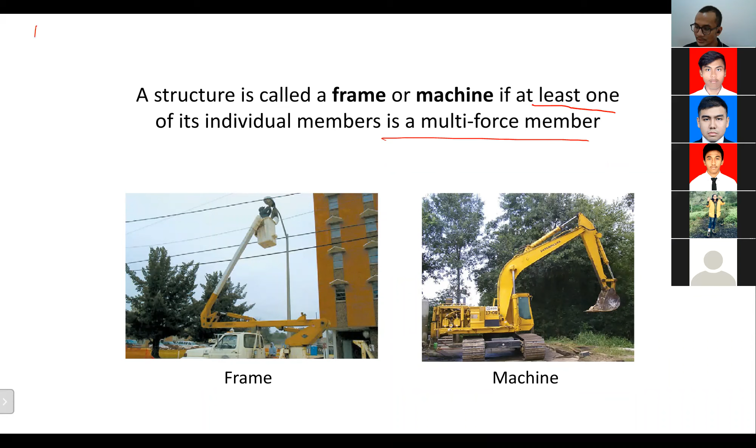So for truss, all members are two-force members. But for frame and machine, at least one member is considered a multi-force member. Multi-force here means more than two-force member, so the number of forces working on that particular member is more than 2.

For this particular definition, is it clear enough? Because this is the most important definition that you're supposed to know to differentiate between frame, machine, and truss. Any questions? So sir, can you elaborate on multi-force member?

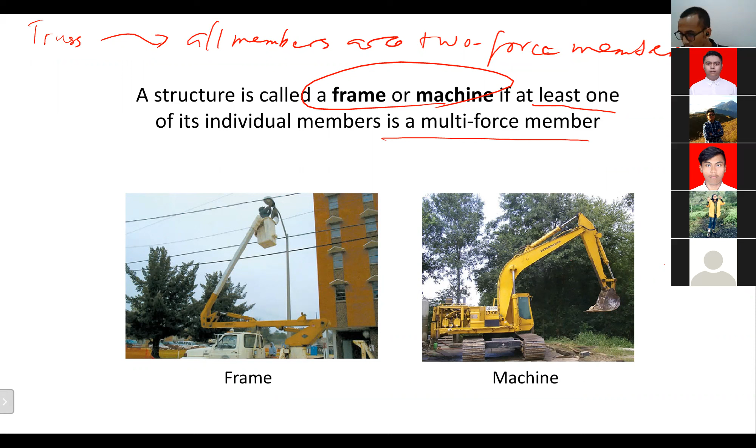Multi-force member is something like this. Previously, when we talked about the framework, for example, if we have a bridge like this, all the members here are either under tension or compression. When I talk about two-force member in the previous truss discussion, when we take a look at the individual members, it's either like this, under tension or under compression. We call this kind of member a two-force member.

Why do we call it a two-force member? Because the forces happening at that particular member only happen at both ends, and the number of forces working there at one member is only 2, not more than 2, only 2, at both ends. That's all. So the forces happening at each member, at all the members, only happen at both ends, and it's either tension or compression like that.

But when we talk about frame or machine, there is a possibility that we have a member like this - this is another example of a member which has a force like this, and then we have an external force like this, or plus an additional moment like this. We consider this a multi-force member.

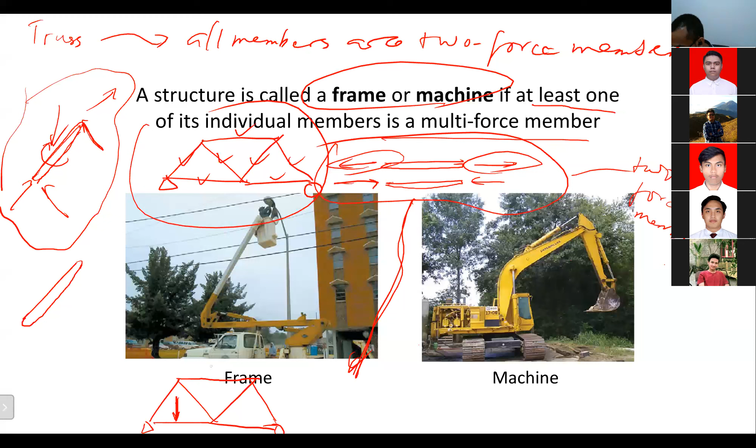But the problem now becomes slightly different because we have a force here, an additional force here, and we have an additional force here, for example, and the force happening at the middle of the member. So for this particular case, this member is not a two-force member anymore, and this other member is not a two-force member anymore, because the forces happening at those two members are not just happening at both ends and are not just under tension or compression. So if we draw the free body diagram of both non-two-force members, it will be like this.

Because it's a non-two force member anymore, we have to draw the forces which is happening there completely, in the complete form like this. And this one is the external force. So the number of forces happening there is not two anymore, it's more than two.

Do you get it, Asad? Also, if a truss is given with a mass, like above it. Yes, correct. Also we cannot consider it as a two force member anymore.

When we have to consider the mass of a truss system, then we cannot consider it as a two force member anymore, because like it or not, we have to put the force in the middle of the member. Like I said, yes, you are correct.

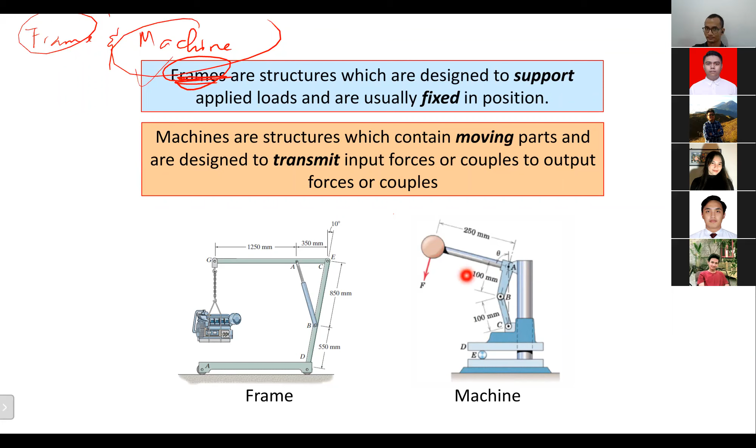Frames are structures which are designed to support applied loads and are usually fixed in position. This is the definition of the frame: structures which are designed to support applied loads and are usually fixed in position. For example, it's like this.

Machines, on the other hand, are structures which contain moving parts and are designed to transmit input force or couples to output force or couples. Normally when we talk about a machine, it must have some kind of mechanism. For example, we call this a machine because we use it to transmit force from here, the force given by our hand, to here, to process the material there. Or something like this, we consider it as a machine as well, to transmit input force to output force or couples.

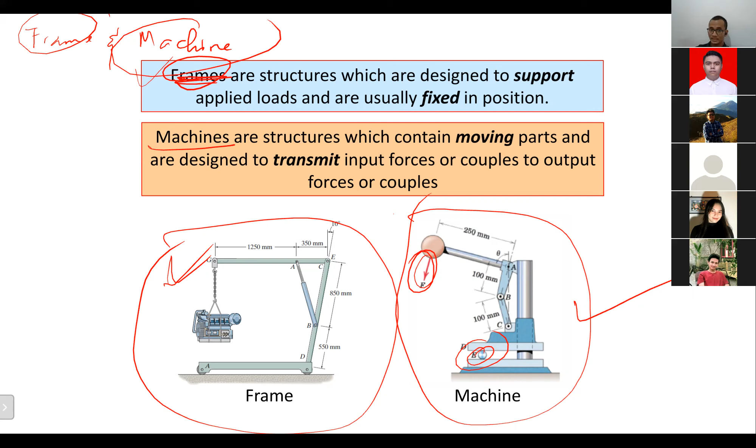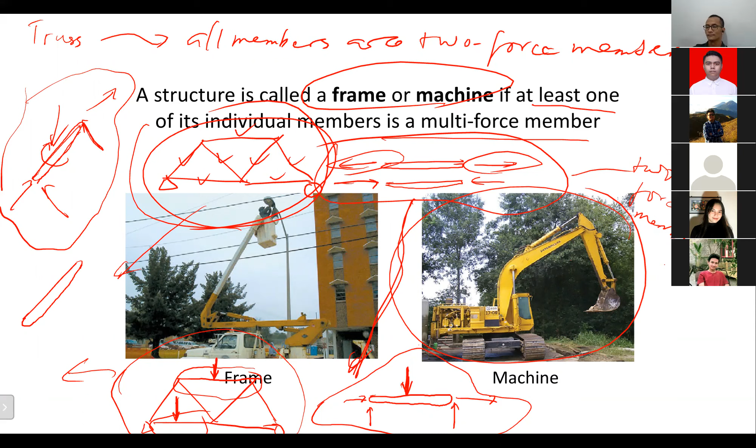But the definition is not that hard. When we use the device to transmit force, transmit the input force and change it into another force to process something, we call it a machine. But if it's just to hold, to support the applied loads like this, we call it a frame. I believe it's supposed to be clear enough, the difference between machine and frame, and also the difference between frame, machine, and the truss. Can you consider this as a truss, or should we consider this as a frame or machine? I believe you already understand about that.

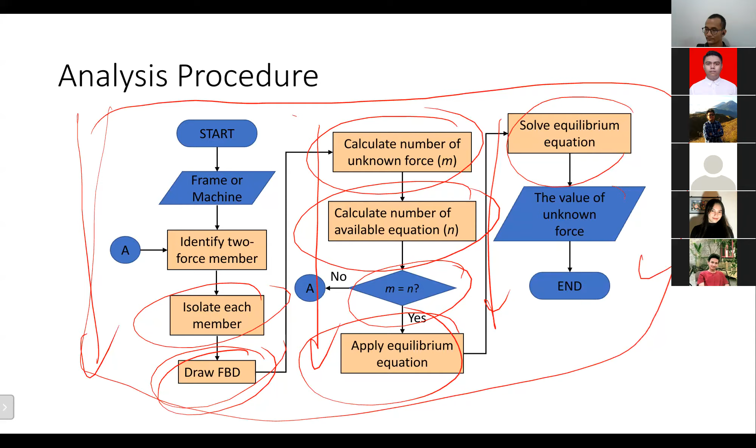Actually that's all the theory behind it, and the rest will be problem examples. I think I will start with the previous homework that we have. I gave it to you. Found it, homework, this one.

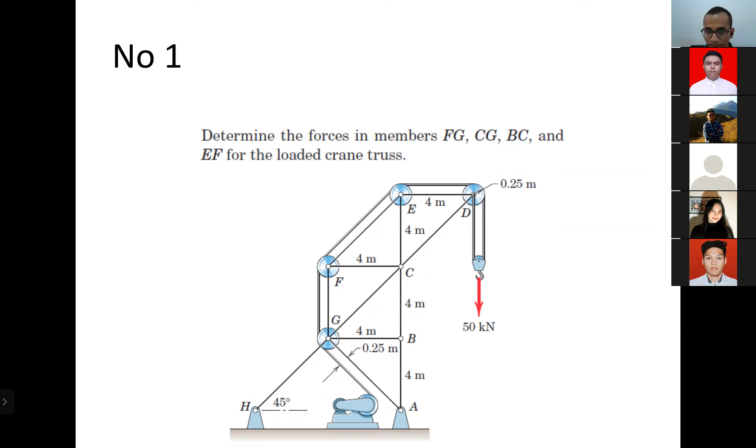This one maybe the problem is with the geometry, and this one is the previous exam problem. So you can practice with this. This is the previous exam problem, so the level of the exam will be quite close to this.

One more thing, because tomorrow night will be the exam, please never think about cheating. Okay, never think about cheating. We will be able to catch you guys from just looking at the answer.

We are experienced enough on that, and actually we did catch a lot of students from your seniors, one year seniors, in the previous mechanics materials exam. A lot of them got it written in their surat pendamping ijazah that they have cheated before. It means you will be judged as a cheater your whole life.

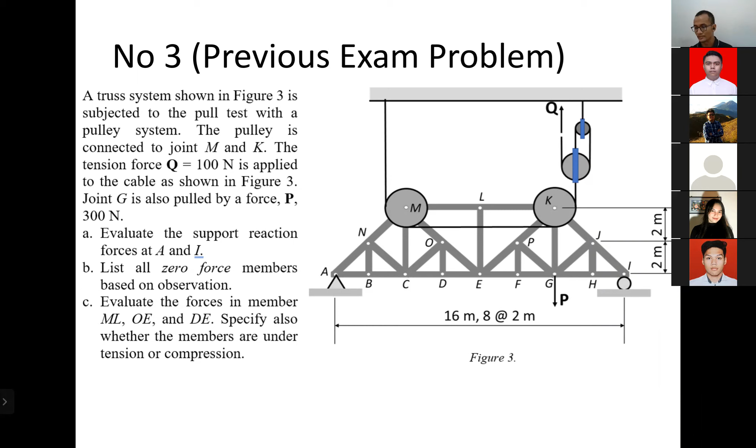This is the frame problem that I gave you guys last week as homework, where the deadline is 10 a.m. in 2 days, and this one as well. I will start with this because this is maybe one of the simplest problems.

Okay. Any of you can solve for this problem or this problem?

That's Risky, sorry sir, can you solve this? Risky? I think so. Okay, good. How about this one? This one as well, I can. Okay good, it's supposed to be straightforward for this one.

Fasa Diara, can you solve for this one? Fasa? Yes, I answer for this one. Sorry? Yes, okay good, it's supposed to be good.

Any of you having a problem with number 4 or number 5? If no one is having a problem, then I will not discuss about this.

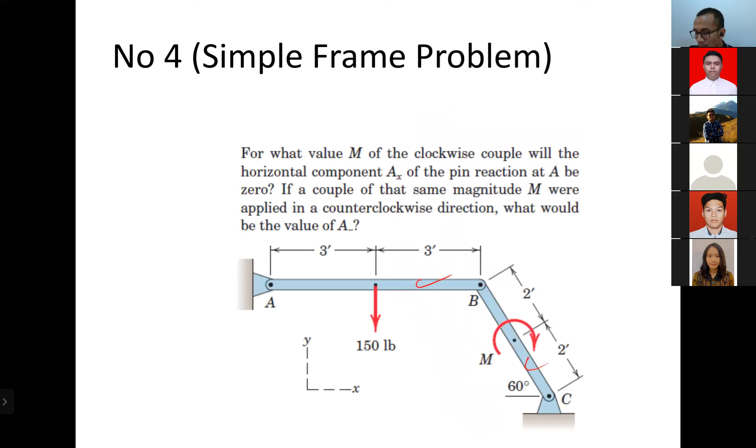For this number 4, both of the members are non two-force member. So AB is a multi-force member, BC is multi-force member. And for number 5, the same: BC is multi-force member, AO is multi-force member, but CD is a two-force member. CD is a two-force member.

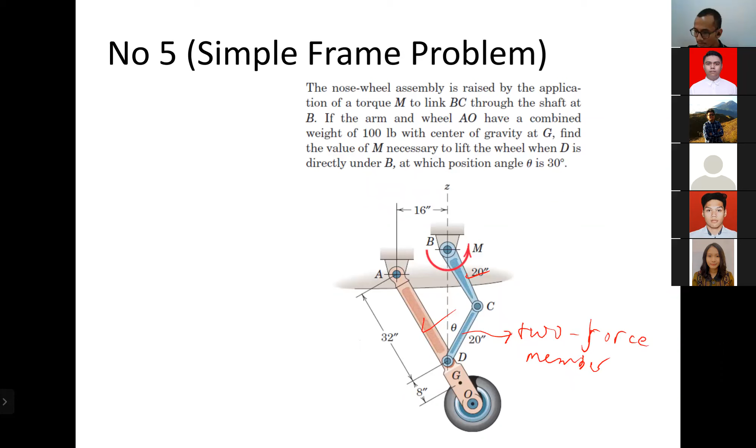And the one in question here is the nose-wheel assembly is raised, because both problems are quite similar, I will just continue. I will just do number 5 because it's slightly more complicated. If you can solve for number 5, number 4 will not be any problem for you. Then I will discuss this.

The nose-wheel assembly is raised by the application of torque M to the link BC through the shaft at B. If the arm and wheel AO have a combined weight of 100 lbf with the center of gravity at G here, so here there will be a weight, right? Downwards, 100 lbf.

Okay, 100 lbf downwards. Then the one in question is find the value of M necessary to lift the wheel when D is directly under B. So in this particular position, you must try to find the value of M necessary to be given there, to at least lift the wheel. The weight is just from link AO and the wheel there, 100 lbf. That's all the weight.

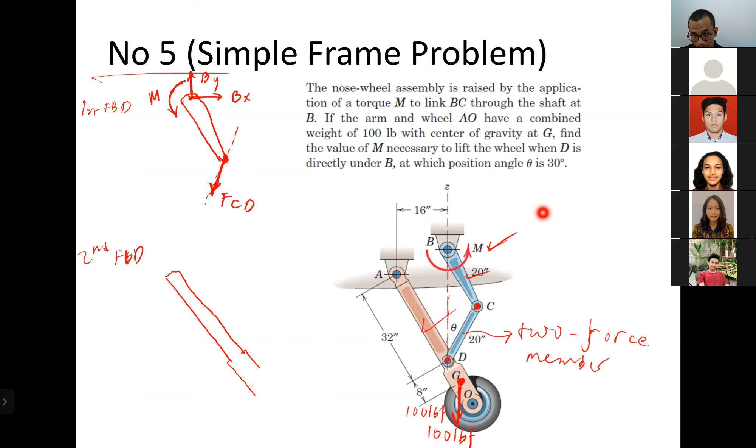Now the second free body diagram, we have to draw it as well for member AO. If we have... then the system is like this, just roughly like this. Then I will try to draw at G here. There will be a force downwards, 100 lbf.

And then what else do we have here? AY and AX, correct. And what else? DC. Yeah, tension, CD. So at point D here, the line of action is supposed to be like this.

It's supposed to be going up or going down? Going up, because it's tension. FCD.

Is the problem complete, Pasha? No, Pak. What else do you have? Can you repeat the question? Both free body diagrams are complete? Complete, Pak. Not yet, you have to complete it with all the dimensions actually.

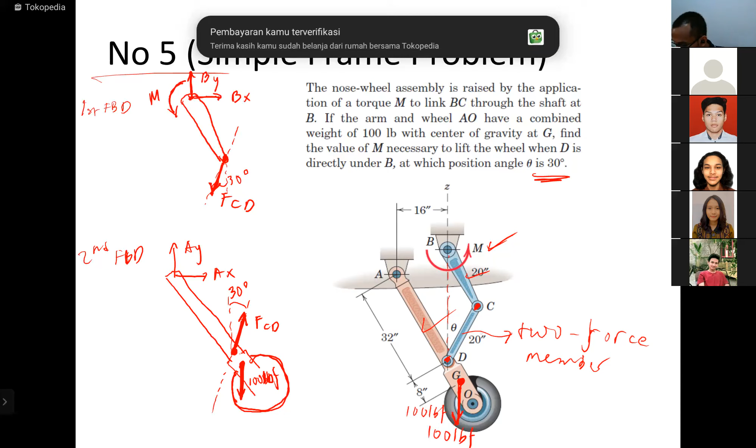Okay, now for the bottom one, the angle there. We have 16 inches and 32 inches, right? Can you help me? What is the angle here? It's alpha. So tangent alpha there must be what? Sorry, it's not tangent, sin alpha. That's the easiest way. Sin alpha must be 16 inches divided by 32 inches, right? Depan per miring, 0.5, right?

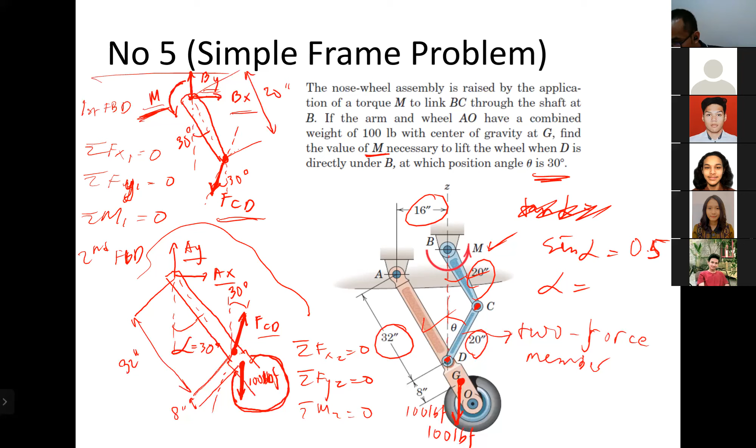Then in that case, we have to solve for this first, right? Because we can solve it using sigma fx2 equal to 0, sigma fy2 equal to 0, and sigma moment 2 equal to 0. Okay, we can solve for AX, AY, FCD, right? But there the question is, we have to find only M, right? The moment M. AY and AX are not asked there, are not asked there, right? Okay, if I try to use sigma moment 2 at point A, I will be able to directly find FCD. Correct or not?

Sigma moment at point A equal to 0. By doing so, I will be able to find FCD. Correct or not? Correct, Pak.

Do you understand, Pasha? Yes, Pak. Okay, we will be able to find FCD by sigma moment at point A. Then use the value of FCD in the first free body diagram to solve for M. Once again, we can use sigma moment at point B equal to 0. We will be able to find M directly there because BX and BY will be eliminated using that particular sigma moment. So 2 equations are enough to solve for this.

Yes I understand. For this one, sin alpha, it must be this distance, right? Divided by this particular distance, right? So from AD, the horizontal distance from A and B divided by the distance between A and D. The horizontal distance is there, yeah.

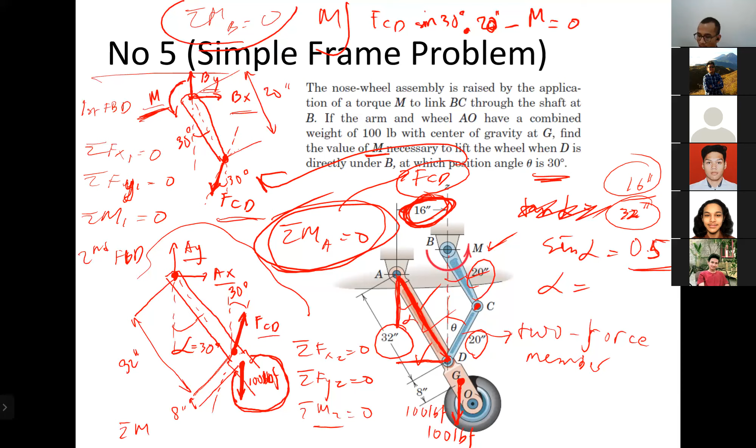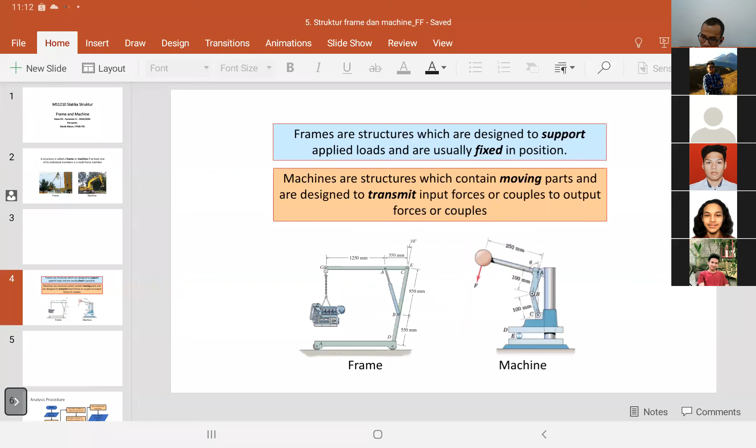Okay, I think stop sharing. Discard then, that I will go to structure. This one, then share again. This is another simple problem, which maybe actually you can start with as well. Okay, now I think I will ask. Ooh, here I will ask. Okay.

S3, can you help me with this one? Hello, S3. Hello S3, where are you? Oh yeah, anyway guys, don't forget to mark your attendance. I already opened it before we start the class. S3 is not around, where is S3? Yes sir, oh you have a problem with your mic? Okay, then that is no worries. Then Adila, in that case. Adila, can you help me with this? Adila?

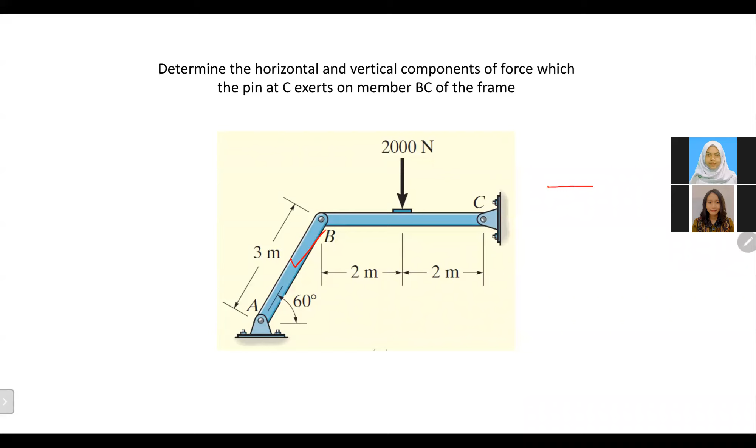Okay, right. Now please help me to draw the free body diagram of member BC. So there's CX and CY at point C. CX and CY, correct? And here we have CY. What else? The 2000 Newton, exactly in the middle, yes. Going down, 2000 Newton. What else? And AB force, FAB, right? Yeah, FAB, okay.

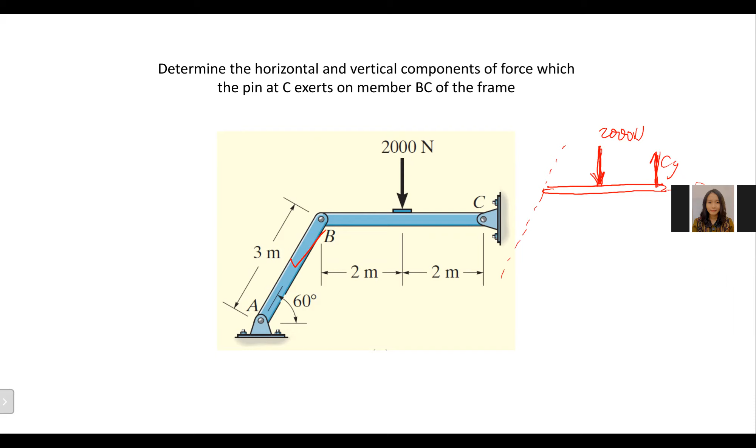You want to make it tension or compression? Compression, tension, compression... well then compression, tension, oh no, I want it to be compression. If it's compression, okay, the direction, and this is the line of action, right? It's supposed to be like this, right? Yeah, okay. If it's compression, the direction is supposed to be to the top right or bottom left. Top right, right, yes correct. Why do you seem uncertain about it? You're supposed to be certain, okay? You are doing it correctly. Top right, it's compression, FAB like this, right?

Yes, okay. What other dimension do we have to know? The 2 meters, yes, yeah correct distance, yeah, it's 2 meters. Here is 2 meters as well. How about the angle for FAB?

60 degrees. Here is 60 degrees, right? Yes. Good.

Determine the horizontal and vertical components of the force here. So Cx and Cy, that's the one in question. How can I find Cx and Cy?

But before that, how many unknowns do we have in this particular free-body diagram? 3. What are those? FAB, Cx, and Cy. This is our unknowns.

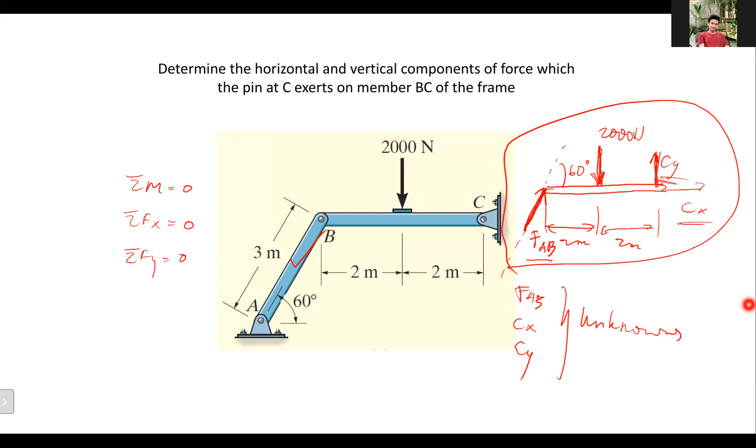So which equation do you want to use first? Sigma moments equal to 0. Against which point? At C. Sigma moment at C equal to 0.

What do we have there? You want counterclockwise or clockwise positive? Counterclockwise positive, so like this. Then what do we have? So we have the 2000 newtons multiplied by 2 meters.

Positive or negative? Positive, correct. What else? Negative FAB sin 60 degrees, multiplied by sin 60, multiplied by 4 meters, equals to 0.

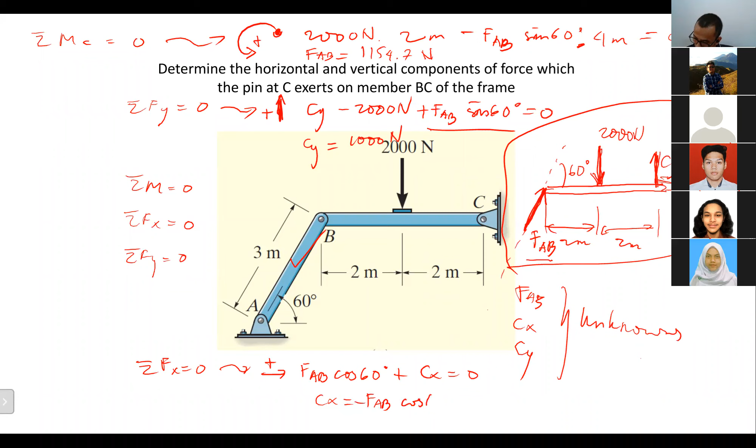FAB cos 60 degree. What else? And Cx, plus or minus? Plus Cx equal to 0. Then Cx equal to minus FAB cos 60 degrees, right? What is the value there?

577.35. Yes, correct. And that's 577.35. Okay.

Thank you, Adila. Let us check. 577.35 and 1000 Cy. Okay, Cy is correct, 1000. Cx is 577. So, yep, you're doing it correctly. Okay, thank you, Adila.

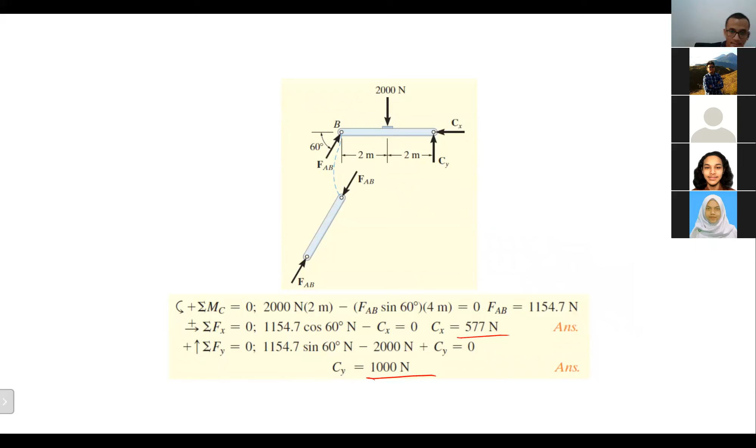Yes, sir. So those are the simpler problem for this frame piece. Okay, this is several other problems that we can try to practice on. There are a lot of much more complicated problems.

Or maybe we can discuss about this tomorrow as well. So let me decide whether it becomes your homework or not after tomorrow. Okay, we can discuss about this tomorrow as well, the more difficult one. For today, I will concentrate on the easier problem.

This is another case which is quite easy. But for now, I will want to ask for Johan. Johan, can you help me with this? Can you determine whether we have a two force member here or not?

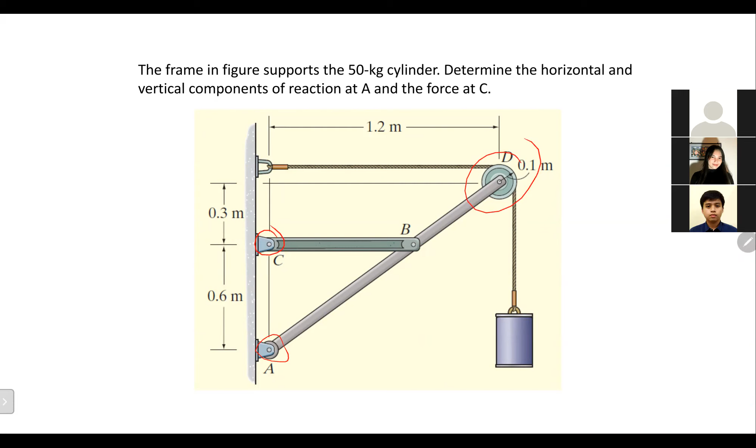Okay. If I draw the free body diagram of the pulley like this, okay. Can you help me the forces happening there? 50 kg. 50 kilogram force. I think I will use international unit. Okay? And I assume that G is 10 in order to make it easier.

So 500 Newton here. If we have 500 Newton there, how about the other tension group? What we supposed to put here? Sorry, there's supposed to be another tension here, right? Yes, sir. Okay. What else there besides the tension there?

From the AD. Yeah, from AD, yes. At point D, what will be happening there? It's supposed to be dy and dx, right? Yes, sir. Because there is a pin. Dy and dx. Okay.

Using sigma moment at point D equal to 0, what we will have is P equal to 500 Newton. Correct, right? Yes, sir.

Okay. Then after that, using sigma Fy equal to 0, what we will have will be dy equal to what? 500 Newton.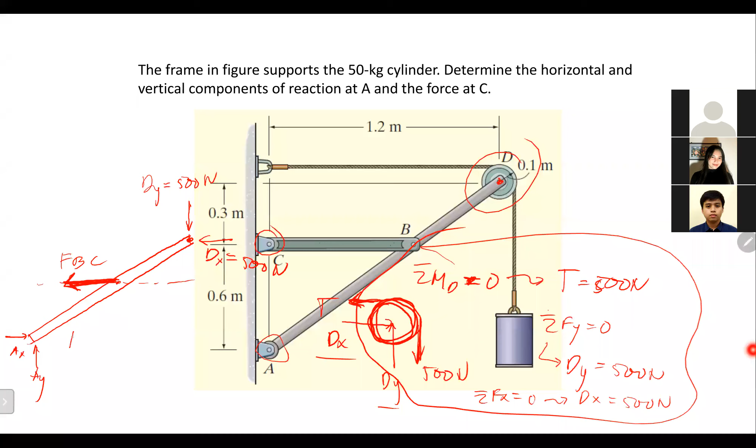Now I'm asking you, Johan, how many unknowns that we have here? 3. 3. Which are, sorry? AX, AY, and FBC.

And how many equations that we have here? 3. Sigma fx equal to 0, sigma fy equal to 0, and sigma moment equal to 0. Correct, right? Yeah. Mm-hmm.

Okay. The number of equations are 3. The number of unknowns are 3 as well, correct, right? Yes, sir. Can we solve for this one? Yes. Okay. We can solve for this. Okay, we can solve for this. We can solve for this as well.

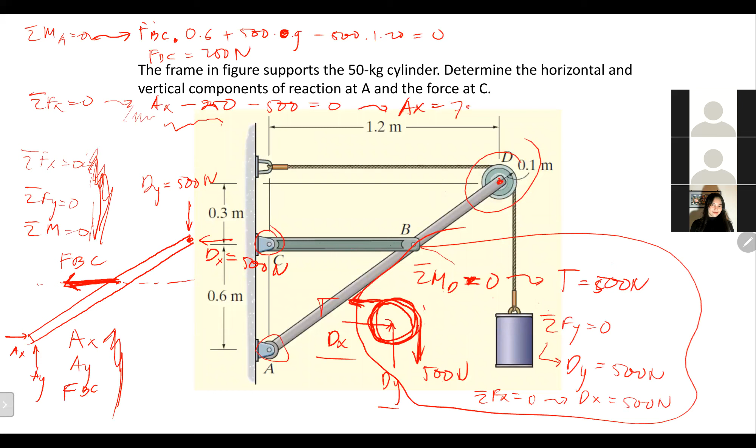This one, right? Yeah. Then using sigma fy equal to 0, what you have is AY minus 500 equal to 0. Then AY equal to 500.

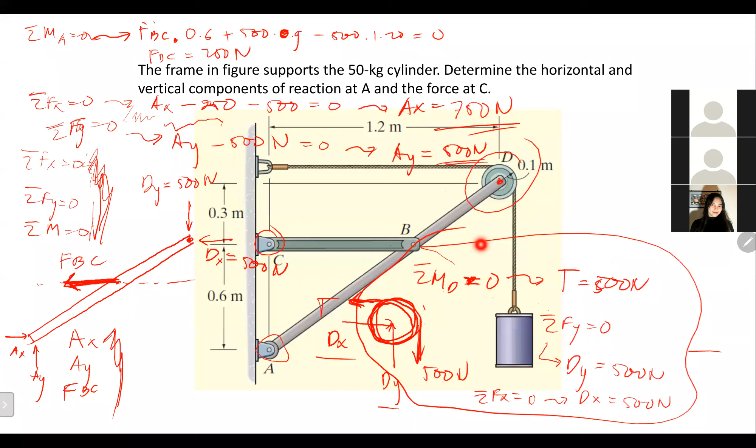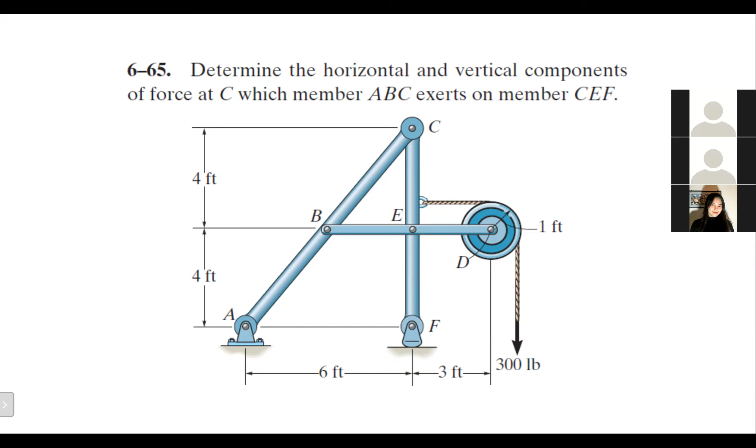That's all, right? Yes, sir. Okay, thank you very much. I think it's okay, it's good. You can help me solve for this. Thank you very much. You're welcome, sir. I think for the rest of this, we can try to continue it tomorrow.

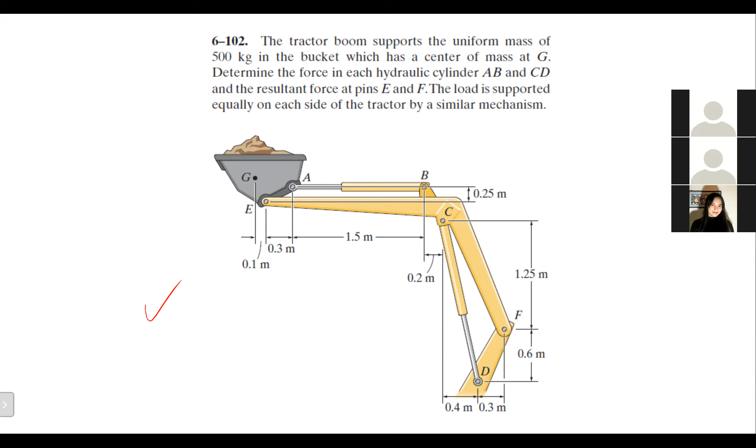For this particular problem, some other problem which is more challenging, I think I will give tomorrow, for example like this and this as well. So that's actually the first part of frame and machine. Most of what I have discussed until now is a frame. We haven't discussed a problem example on the machine yet, but the way to solve it is more or less the same. This is a machine, but I haven't discussed it yet.

But tomorrow I will try to discuss about this, and this one as well. So for the first hour, I will give several examples on the machine, like this and this. These two I will discuss tomorrow morning from 7 to 8. Then from 8 to 9 it's more of a Q&A session for our midterm exam. I think it's supposed to be clear what we will do tomorrow.

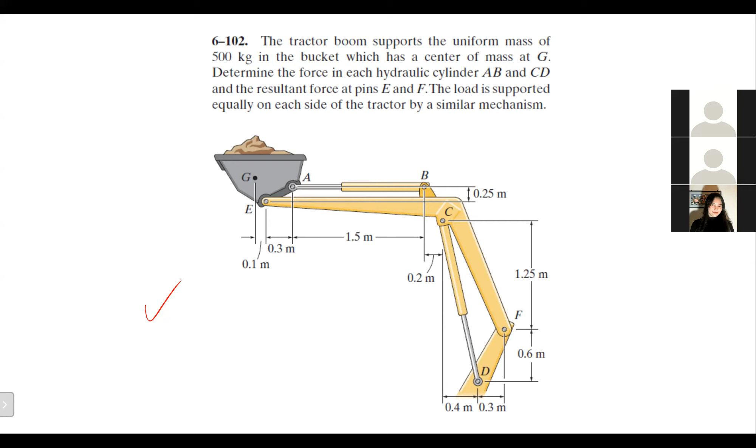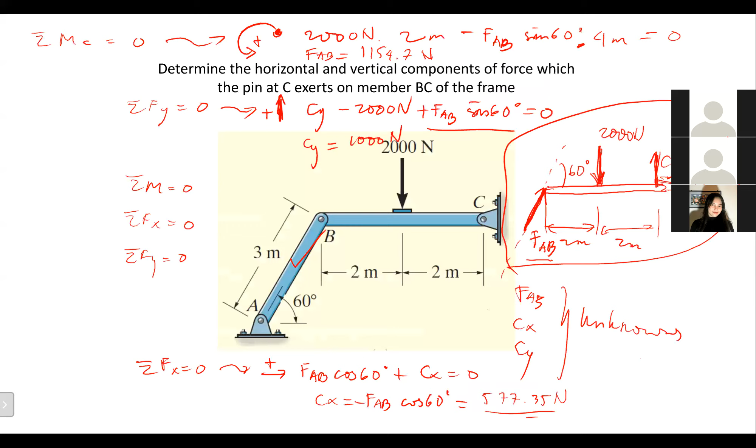Okay, any question about the frame and machine, guys, about all the problems we have discussed up until now, and all the definitions as well? Anyone having any question? Sunita, is it clear? Is it clear, the explanation that I gave you guys today? Do you have any questions? No, sir. Okay, good.

Isabella, you ready? Do you have any question, Isabella? Tidak ada, Pak. Okay. Darian Patrick, you have any question? At the moment, no, sir.

Okay, so most likely for you it's still quite simple, because the problems we discussed today are still very simple. But starting from tomorrow, I think I will discuss more complex problems, like the ones in the machine, some of the machine problems that we have here. This one is quite complex, right? And this one as well will be quite complex. So these two, I believe, I will discuss tomorrow morning.